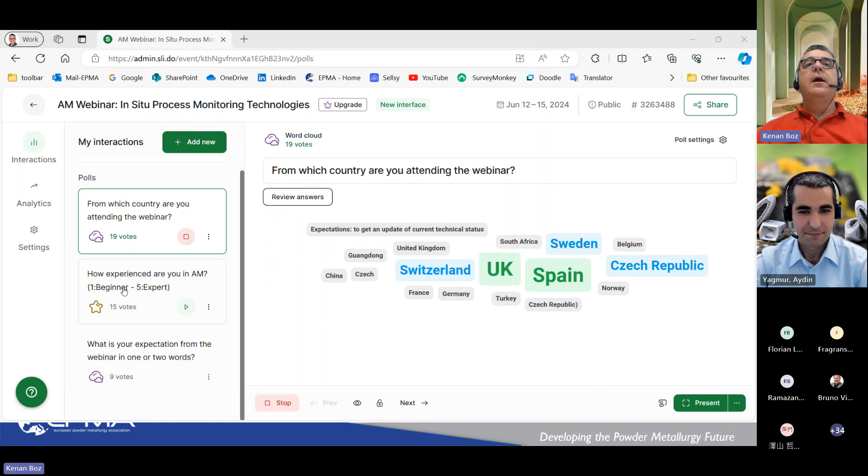I would like to go to the second question. How experienced are you in AM? Well, it looks like our audience is really high level. We have strong experts following us. So thank you for joining and giving time for this webinar.

So the last question is, what is your expectation from the webinar? I think the most important expectation is to learn more about in situ monitoring. So that's why we are here. So we will see that. So that's all for the Slido. Thank you for your answers.

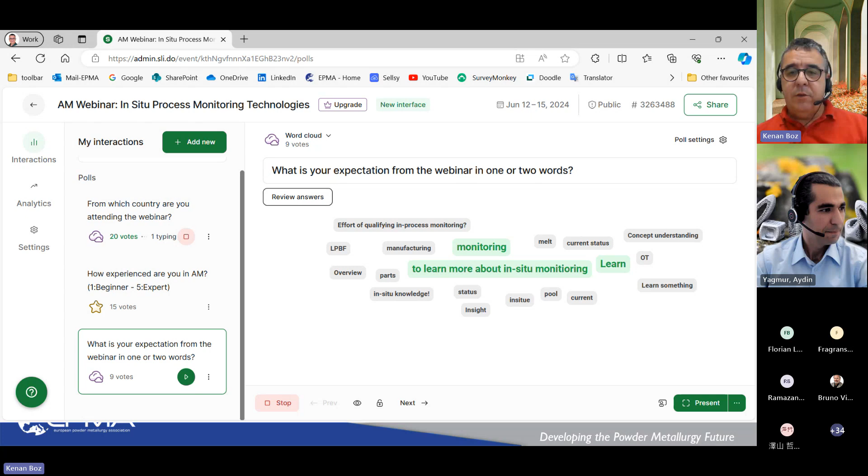Now I would like to introduce you the 2 organizations, that is EPMA and EOS, shortly, and then give the floor to Aydın. Okay. Let's go back. So as I said, this is the agenda. So yes, let me introduce EPMA first.

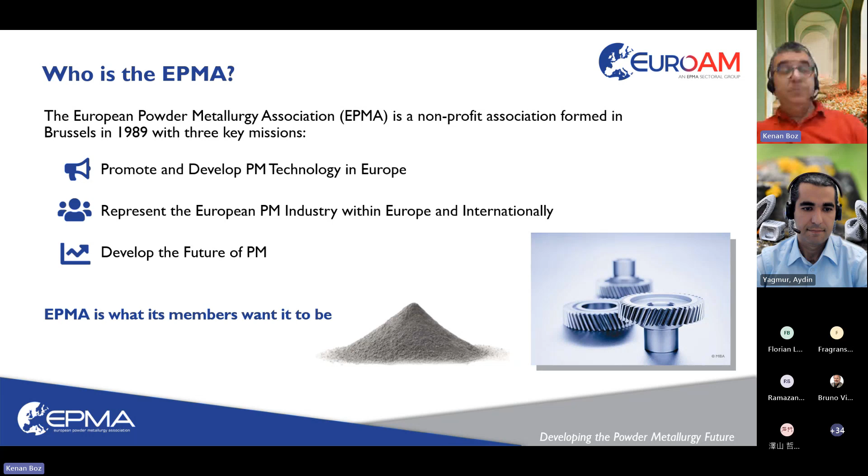The European Powder Metallurgy Association is a non-profit organization built in 1989 with the key missions of promoting and developing the powder metallurgy technology in Europe, representing the industry in Europe and internationally, and developing a future for PM, powder metallurgy. Basically, we say that EPMA is what its members want it to be.

About the EuroAM sectoral group, this was launched in May 2013 and is open to companies, organizations, even individuals across the supply chain who are willing to become members of EPMA. And the EuroAM group has four main objectives. Number one is increase awareness on AM technology, especially metal powder-based products.

Number two, enable the benefits of joint actions like research programs, workshops, projects, benchmarking, statistics, etc., and improve the understanding of benefits of metal-based AM technology by end users, designers, engineers, and students as well. And finally, to assist the development of international standards for the AM sector.

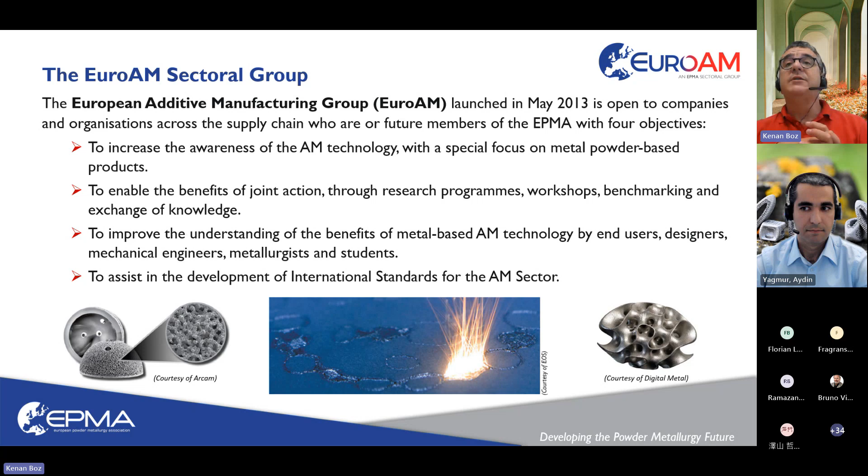About EOS group, I would like to say a couple of words. EOS is headquartered in Krailling, Germany, and EOS is a global leader in industrial 3D printing technology. Just like EPMA, it was also founded in 1989, and the company specializes in providing innovative solutions for AM, including both metal and polymer 3D printing systems. EOS cutting-edge technology is widely used across various industries such as aerospace, automotive, medical, and consumer goods, enabling the production of complex and high-quality components.

With a strong commitment to research and development, EOS continues to drive advancements in 3D printing, offering unparalleled precision and efficiency to its clients worldwide. So that's all about our organizations.

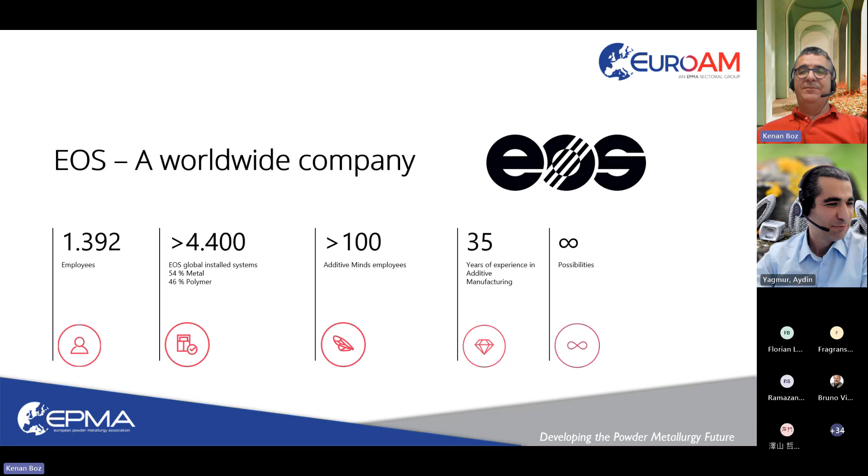Now, maybe it's time to give the word to Aydın. Thank you, Kenan, for the introduction. Yeah, I should maybe stop sharing the screen. Yeah, okay, I stopped. I'm back. So I know it's a lot of words and things. Sorry for that, but this is good for the entire structure of the webinar. And yes, Aydın, you already put on screen the in situ process monitoring technologies topic. So the floor is yours. We will have your presentation, and at the end of the presentation, we will have a Q&A session with our audience. The floor is yours.

Great. Thank you, Kenan, once more. And let's start our webinar. I would like to today give you some insights on the technology, what is today's state-of-the-art technology on in-situ process monitoring, in-situ monitoring systems, applications, of course, the fun part, and the trends and what is coming in the future.

So why should you attend, or why are monitoring technologies of interest today? Because if you look at the recent scientific literature, it is calculated that cost reduction of more than 10% is possible with implementing monitoring technologies. Also, we see a lot of papers and research showing that increasing the performance of materials and products is possible with process optimization, which is more effective by utilizing monitoring technologies.

Of course, for the sake of creating a stable and repeatable process, it is very useful to understand the process and make fine-tuning, finding an optimization of quality, performance, and cost of production. And in serial production, monitoring technologies also enable that the process is documented, recorded, and available for later research or investigations, and it helps companies with quality assurance and process validations, which is an emerging trend. And we have some ongoing projects, which I will describe in some detail in the coming slides as future trends.

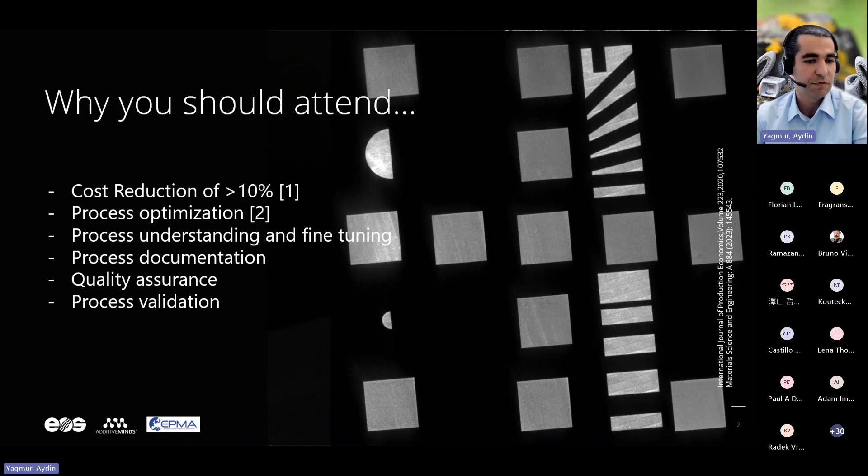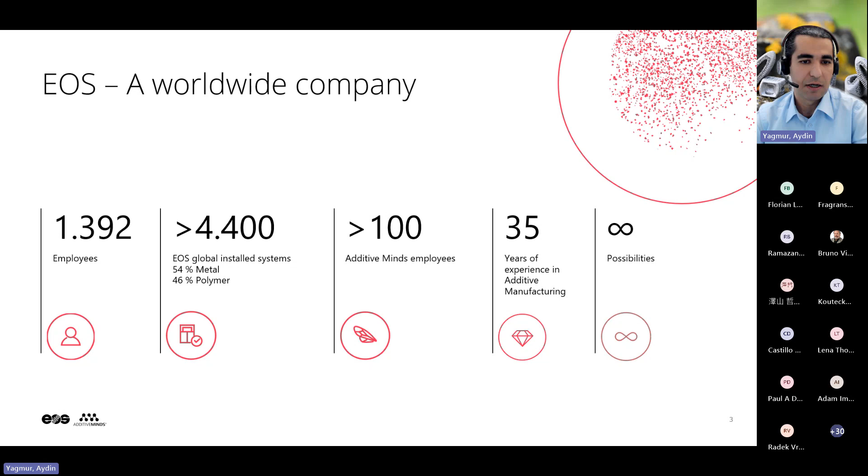As Kenan mentioned, we are a global company focusing only on additive manufacturing, and I am a member of Additive Minds, the application and consulting division of EOS. We are more than 100 individuals with maybe more than hundreds of years of cumulative experience in additive manufacturing, and we help our customers quickly and reliably implement this technology.

As EOS, we are a leader in additive manufacturing solutions, and we see that our solutions are becoming a part of the digital factories of the future. We also see that our technology will be a key pillar of responsible manufacturing, which I will describe in this slide in a little more detail. We see different aspects of our impact on society. The very first one is contribution to sustainability: with our technology, production with less waste, less energy consumption, and less carbon emissions is possible. Also, the cost effectiveness of production and the final product is increasing.

One of my favorite applications is, of course, medical. We see good advancement in the medical industry, especially in patient-specific solutions for improving people's lives. And since the time from design or idea to physical part is being shortened, market entry times are getting shorter and shorter. As a result of all this, we see potential for greater economic growth, enabling different startups to come into the market and advance the technology.

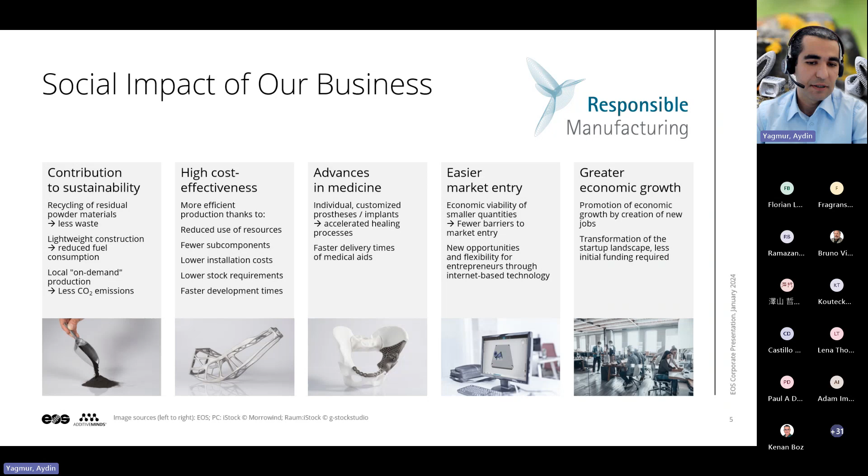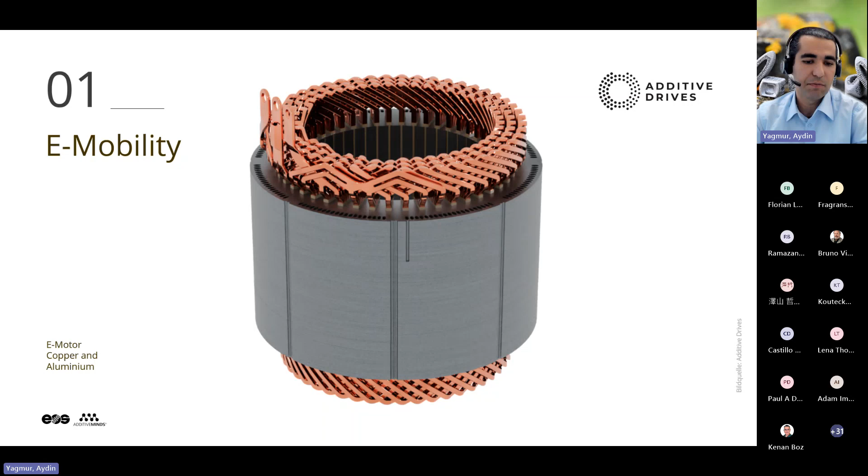Let's look at some examples of how we achieve this. This is a nice example from our partner Additive Drives. It's a copper and aluminum application, hairpin stator prototyping, built with additive manufacturing, which has advantages: no other processes are needed, no forming or welding, and the performance of the product is increased with additive manufacturing.

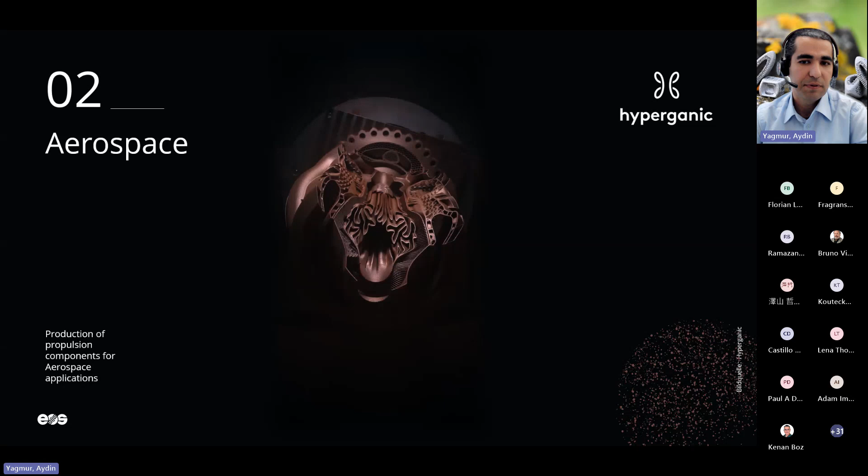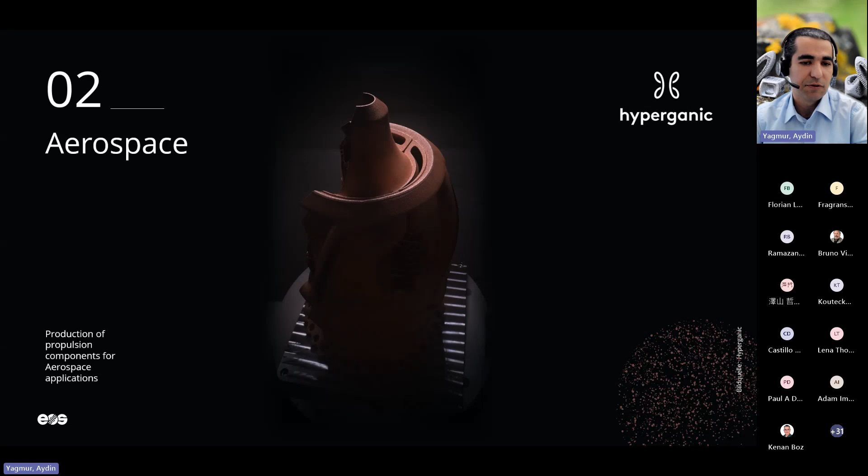Another example is propulsion components. This is an interesting story with the company Hyperganic. This part was designed by an algorithm, not by an engineer, so some kind of design automation is emerging. With our technology, we showed that this can be manufactured. We built this part first on an EOS M 400-4 four-laser machine with Inconel 718, and the part you saw in the video was also built on an AMCM machine with copper.

The last example in this section is a heat exchanger used for racing cars. With our partner Conflux, this application was successfully implemented. What are the advantages? I think it's self-explanatory that a highly complex structure was achieved. The efficiency of the heat exchanger increased, and the dimensions and weight were reduced, so in total there is a very good improvement of the heat exchanger, having an effect on the automotive side.

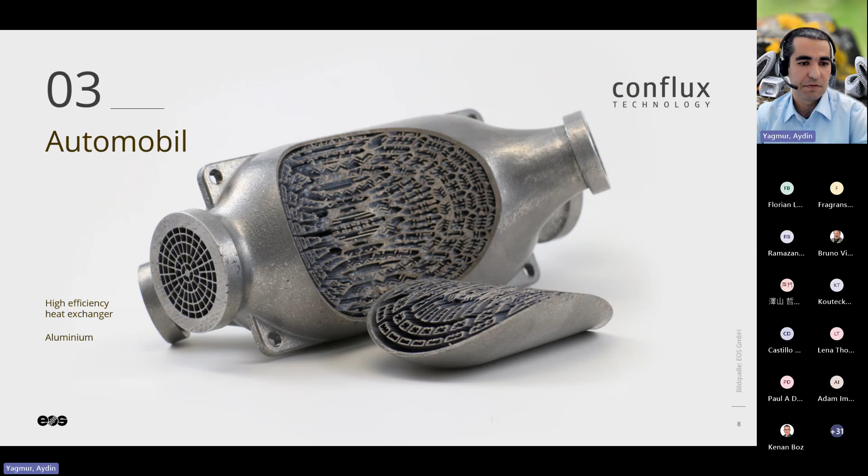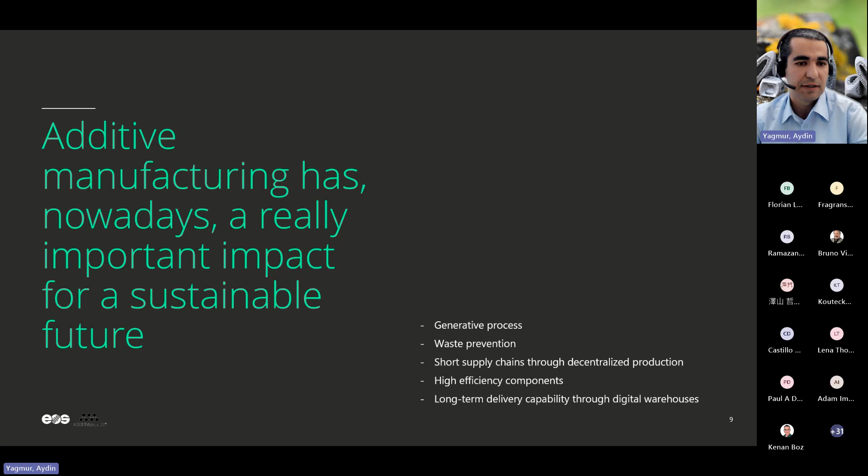So we see a good commitment and a good way forward for additive manufacturing for a sustainable future: we decrease waste, we increase speed to market, and supply chains are getting optimized because decentralized production is possible with additive manufacturing. Production on time is also possible, so stock costs and resource consumption are also decreasing.

After this introduction, I would like to start with the foundations of our technology, direct metal laser solidification, as we name the technology. General literature also calls it laser powder bed fusion. I would like to start with the foundations of the technology; this will be an answer to why we need monitoring systems.

Since the audience is very experienced, I will go very briefly over how the technology works. We mainly have a CAD design, and we create slices of the part, so layers. Each layer is exposed with a laser and solidified layer by layer. For each layer, of course, powder is recoated for the next layer. At the end, we have the three-dimensional final part.

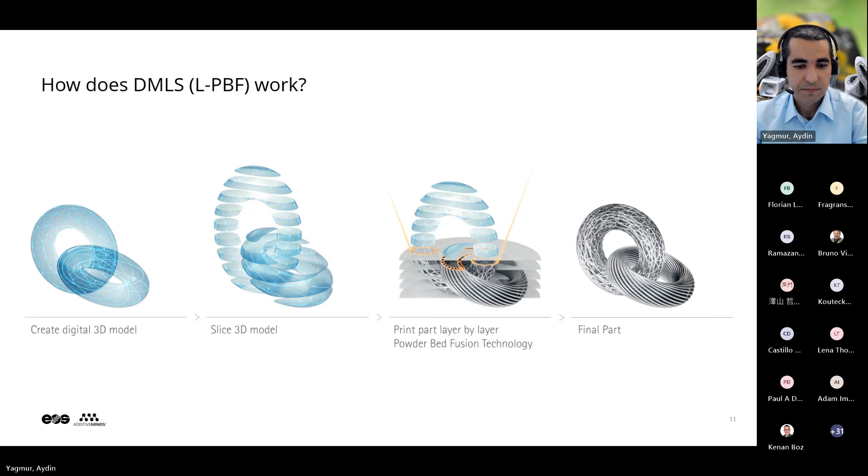Let's go a little into details: how lasers and metals interact. A good starting approximation uses power density and the corresponding behavior of the metal. If the power density is less than 0.1 megawatt per square centimeter, this is simply heating of the material. If we increase the power density to 0.5 megawatt per square centimeter, we observe conduction melting.

If we increase the power density even further, we have so-called keyhole melting, which is the heart of our technology. If we keep increasing the power density, we observe plasma melting, which is not desired for our technology because the created plasma interferes with the laser and prevents laser-material interaction, decreases the efficiency of laser absorption, and causes quality problems. So our technology relies on keyhole melting.

There can be some questions. In the image you see there are some byproducts coming from the melt pool. Why do we not use conduction melting, which is a more calm process? There are different reasons. The very first reason is the productivity.

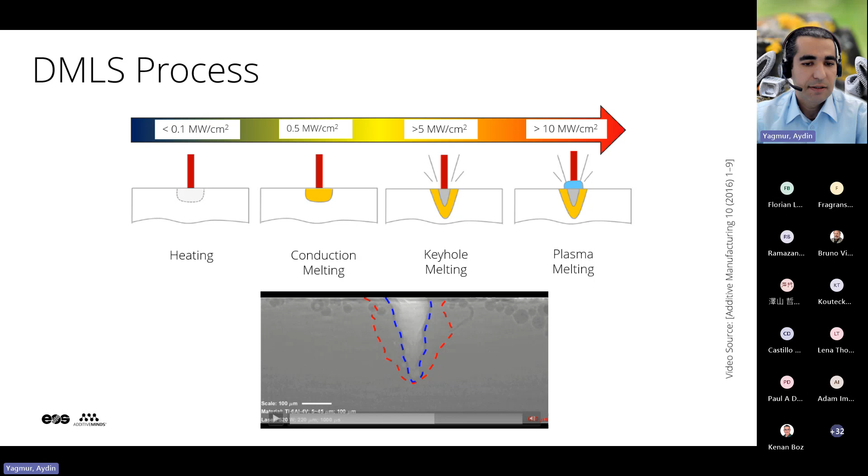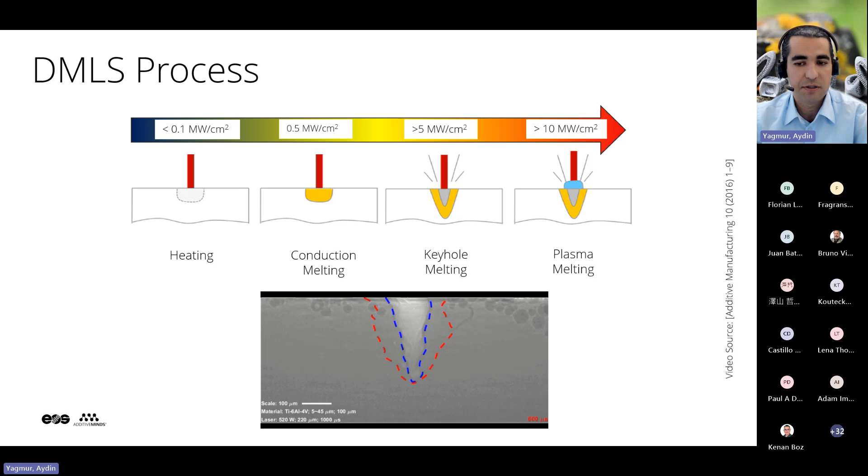Let's have a quick look at a video from this source where we can observe the formation of the keyhole during this dynamic process. Between the red dashed line and blue dashed line, what we see is the molten metal. And within the blue line, we see so-called keyhole melting. In this area, we have a laser beam and metal vapor. And this area can also create so-called spatters, which I will give some more details on in the coming slides.

And if the process is not optimized or some interference or problems occur, what will happen? If the laser energy is not absorbed by the material in the optimized way, we observe a formation of volume defects, so-called lack of fusion defects, which are very damaging to the material properties because of the shape with notches inside. Lack of fusion defects are not desired, are not accepted in additive manufacturing.

You see different visuals here, an SEM picture on the top right side, and also metallographic pictures, and we can also estimate the shape of the metal powder, the raw material, which was not fully fused or melted. This is why we call it lack of fusion. So this is what happens if the energy input is less than the optimum values.

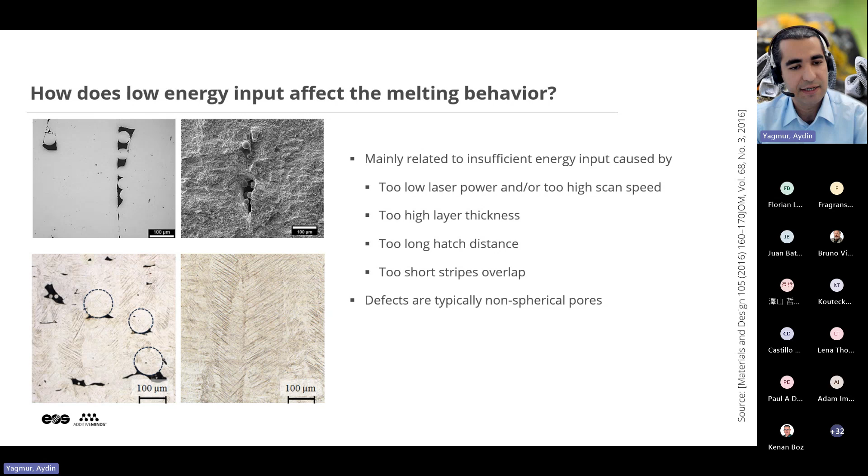And if there is too much energy on the other side, then we see instability of the keyhole, causing more sphere-like defects. Sometimes I see that these are called keyholes, and that keyhole is not desired. This is not exactly true. Keyhole defects, which come from the destabilization of the keyhole, are not desired. The keyhole itself, a stable keyhole, is the heart of our process.

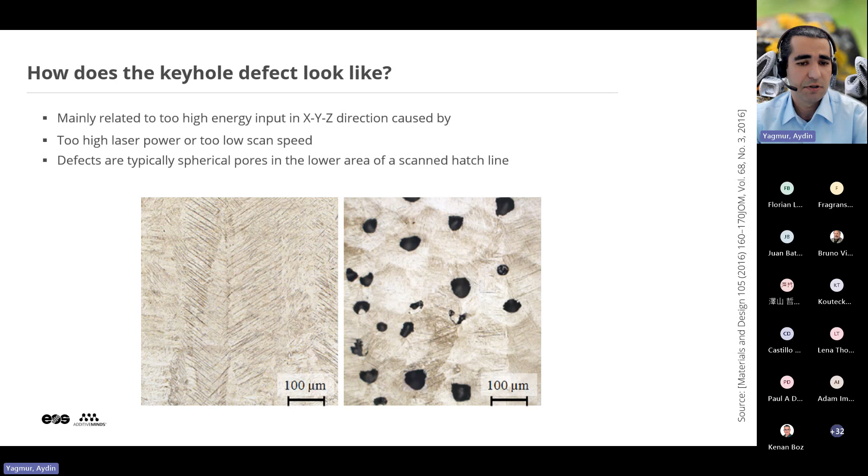As I said shortly, the process can create different byproducts, including so-called spatters, solidified metallic particles that are spread along the powder bed, and they may have different sources. For example, the very first type is created from the keyhole directly due to the pressure difference, and they can create sphere-like spatters.

The second type is coming from the melt pool, where the laser has just passed, having a more irregular shape, or molten material just falling down on the existing, not yet melted powder, which also has irregular shapes. So these are mostly non-desired, or at least these kinds of byproducts should be under control.

That means the laser powder bed fusion process is highly dynamic, and when it is not optimized or when some problems occur during the process, the byproducts created can cause problems. And that is why we need monitoring systems to record and understand how the process is being optimized, and also to qualify that the process is working as it is supposed to.

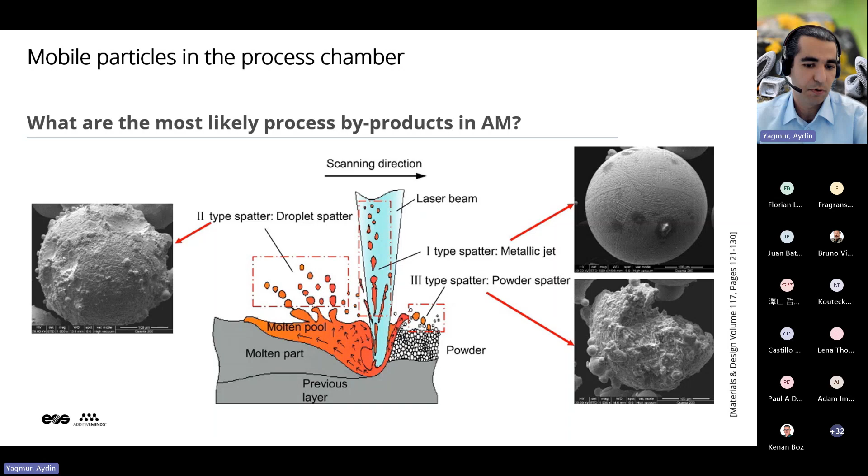We understood the need for monitoring systems, so let's see how monitoring systems work, what kind of information they deliver to us, and how we can understand, for example, different process behavior like we see here in a design of experiment build where we apply different parameters.

What is in-situ monitoring in additive manufacturing? First of all, I can recommend for further reading a good ASTM standard, which you will find in the handouts that we will deliver after the webinar. So it's very good for further reading.

In my own words, in-situ monitoring is recording the data during fabrication with different sensors. I will give some details about types of sensors. And also analyzing data during and after fabrication, which is an emerging topic that I will also give some details on. We can analyze data, and nowadays we can also control and regulate our process during the process using the data from the monitoring systems.

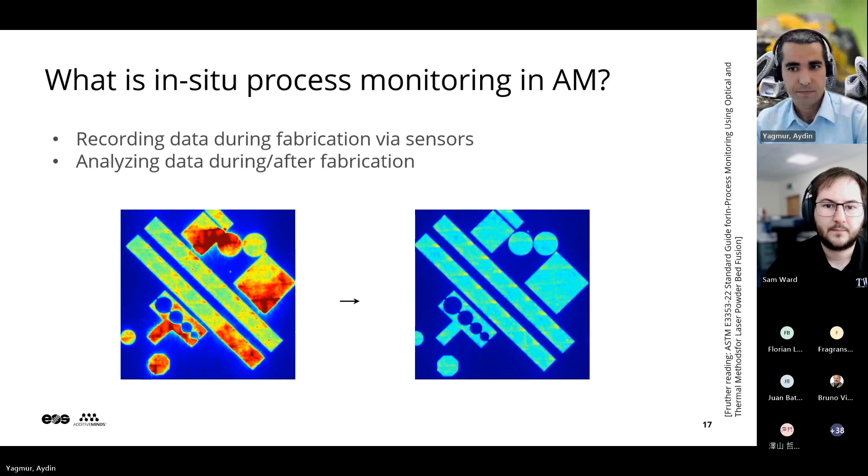At EOS product portfolio, we have different grouping of sensors. The very first one is powder bed. So it is like a webcam taking pictures of the powder bed after recoating and after exposure, and gives engineers a chance to analyze most of the building problems or recoating problems.

Then we have a melt pool system. It is a photodiode that collects the backscattered laser beam in visible spectrum and near infrared wavelength spectrum that give insights from the melt pool, as the name indicates.

The next system is EOSTATE Exposure OT, which is a unique solution in the market, that it is a camera taking pictures of the whole build plate during the layer time and gives us a long exposure or long time information of the powder bed, not only during melting, but also after melting. So we can see the whole build plate with EOSTATE Exposure OT.

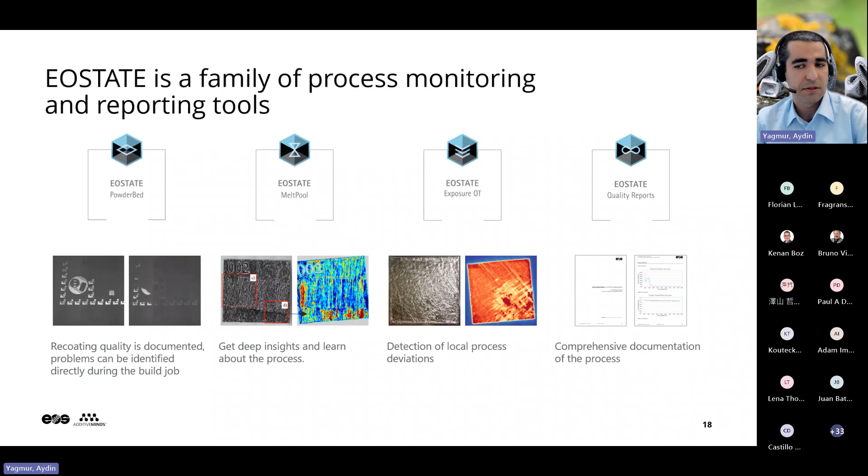Quality reports are all the rest sensors, for example, oxygen concentration, temperature or humidity, which is also very useful to document and to analyze the production. Let's have a deeper look. What kind of sensors get what kind of data?

This is the very first one, melt pool monitoring. This is an addition to the optical path, and it detects the intensity of the light. It is a photodiode. What does it mean? Photodiodes can record the intensity of a given wavelength, but they do not have location information. This information is taken from the scanner, and the images, which I will show in a few seconds, are created from the melt pool. So melt pool is getting information from the melt pool only. So you can analyze the stability of the laser exposure with melt pool.

The second system is a camera, so it knows where the signal is coming from. No additional information is needed for the data, and it takes pictures during the layer time. So it takes pictures before, during, and after melting, and we can have an integrated image of the full build plate. A big difference between OT and melt pool is with melt pool, we can gather data only from where the laser is melting. So we cannot get data outside of the parts that are being fabricated. But with OT, we can also get data from the surroundings, so the whole build plate.

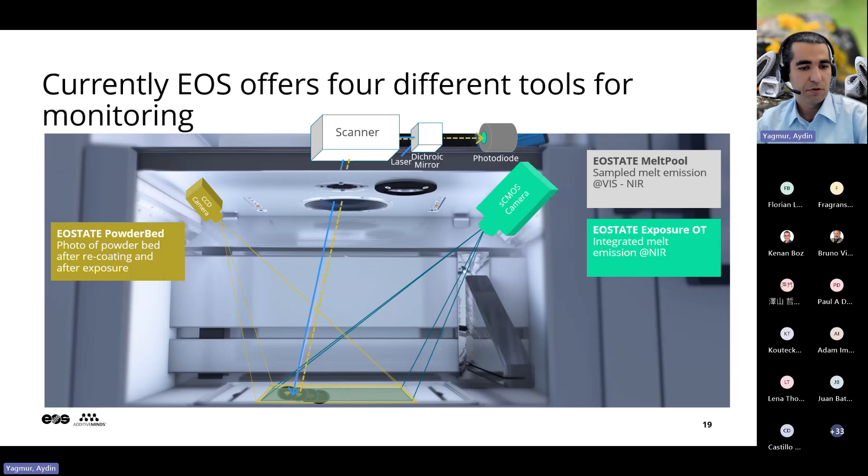And last but not least, we have our powder bed camera, which is also very useful for buildability problems, recoating problems, to understand how the process behaved. I would like to shortly show a good feature of our powder bed camera, that we can watch or observe the process live with powder bed, which is not being recorded, but we record pictures after recoating and exposure.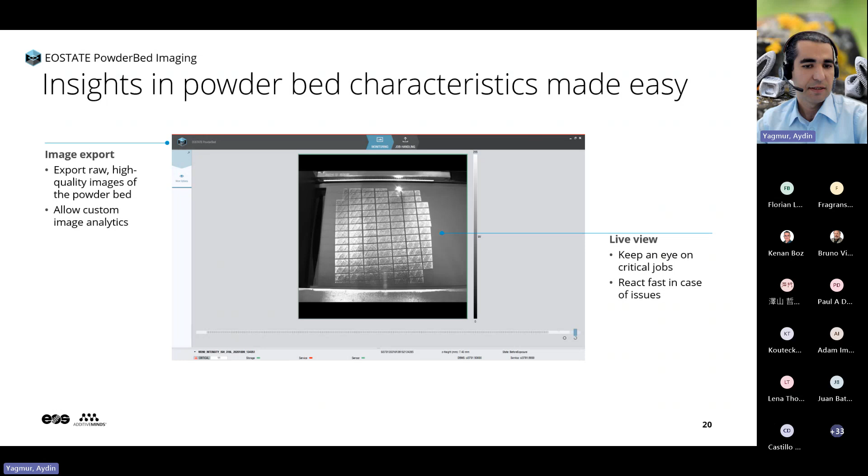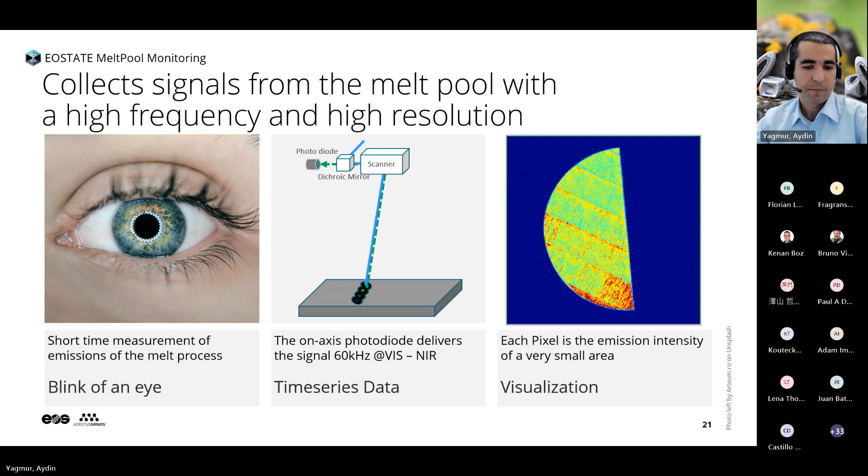For melt pool, as I said, it is focusing on the laser exposure area and getting the location information from the scanner and created this compound picture. So all this information that we see on the right side was recorded by the photodiode, and with the location information from the scanner, we created this compound picture. And what we see here is, for example, in this area, an overheating caused by short vectors, and we see the behavior during melting.

Let's look at the same part, but this time OT picture. OT records the data not only during melting, but also cooling down, also solidification until the layer is completed. So we have a different picture here. So we see that a bigger area was influenced in terms of overheating, and this was detected by OT. And as I said, we can also see the spatter behavior.

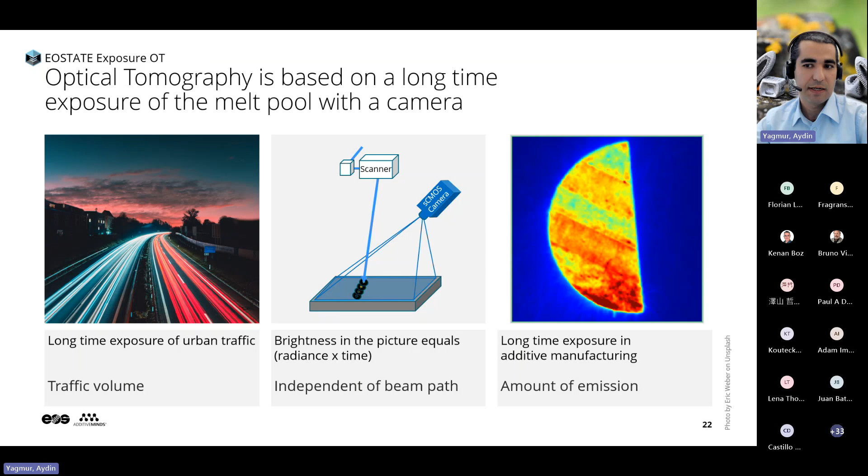What lies behind this? Let's have a repetition. This is the camera taking data, pictures, 10 pictures per second during the layer time, and getting information, not only backscattered, but also any kind of emission created on the powder bed.

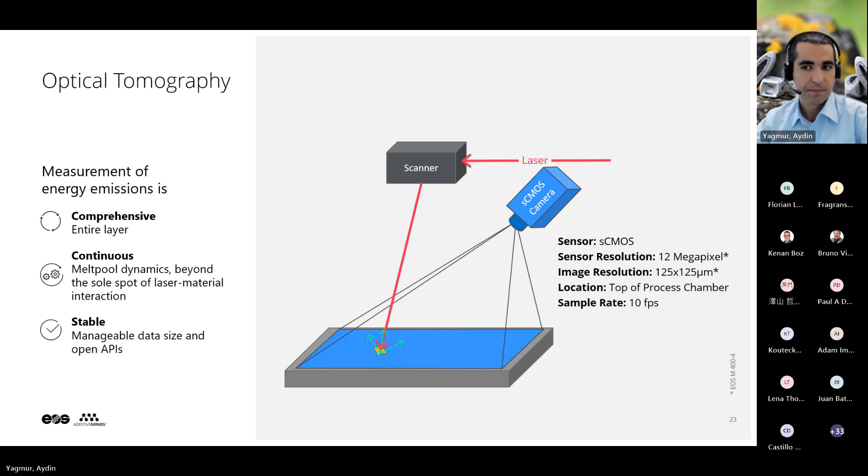This is the interface, and if you are familiar with EOS software, they have similar backbone. So it is, I would say, very user-friendly interface that we can see the created images. It is the same software, the same interface for both OT, melt pool, and powder bed. So we can see the images. We can see the statistical summary of the part during the Z height, and we can see the indications. So anomalies detected during the build by OT software.

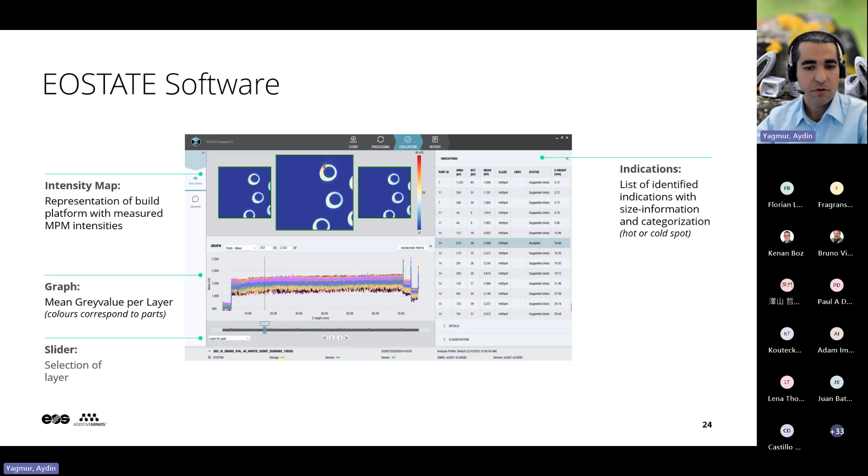Let's have a look at what kind of anomalies can be detected. For example, here you see with the red line the anomaly on the part which is coming from the laser flow interaction was detected by our OT. We have different detectors that can be optimized, and we can detect this area. This is documented. The intensity of this area is documented, and we can compare and evaluate the formation and the severity of the indication. Here is again an example of short vector induced overheating. These areas also can be detected.

And for further analysis, for example, stability of a process, maybe dynamic properties, dynamic material properties of a process can be detected by using OT images. So we can see here 4 different parameters applied, and with some third-party software, we can even make numerical analysis of the spatters. We can count them. We can also analyze the mean value and even size of the spatters.

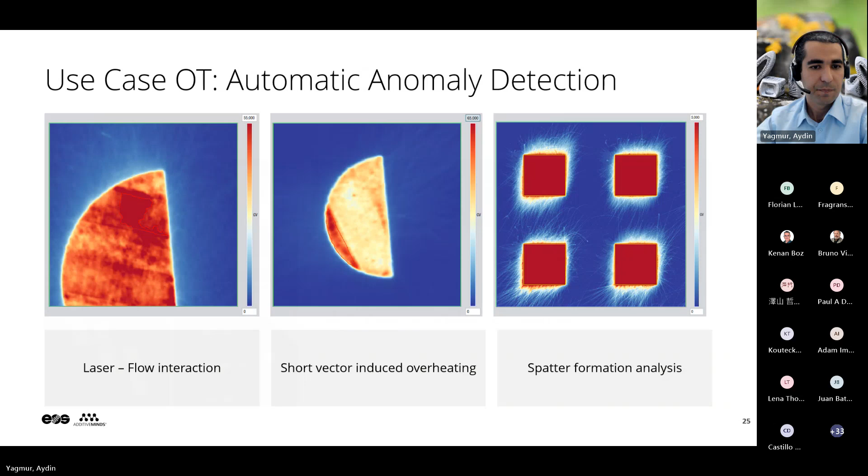Some examples, use cases. If there are dirts or problems on the optical path that affect the laser beam, we can detect them easily with OT because we see anomalies which can also be automatically detected, always on the same position. This is a good indication that something is wrong in the optical path, causing improper or non-optimized laser material interaction, which should be solved.

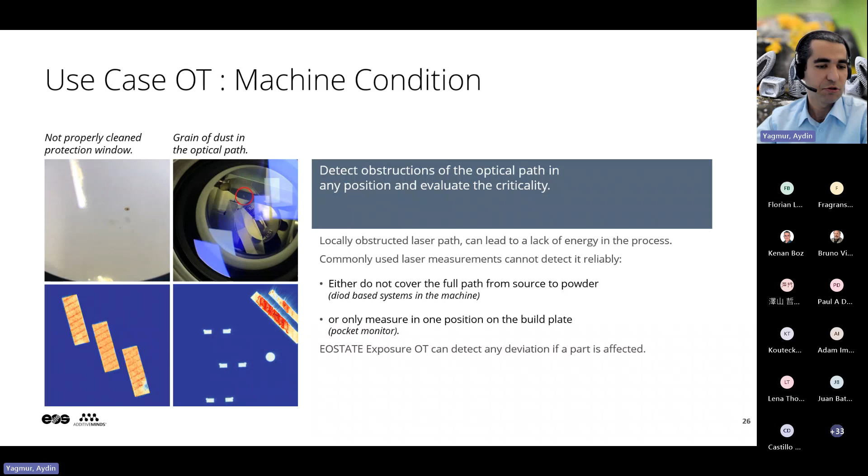Another use case is from our colleagues in the APAC region, who worked with a university, and we also have a white paper on this. What is the correlation of OT with CT? Because CT is widely used in industry, can we replace CT scan, or reduce CT scan costs by applying OT? The answer is yes.

We created a setup that causes unpredictable random problems in the process, and we compared the signal behavior of OT with the CT scan. We came up with a result showing a very high correlation of OT signal to CT signals, which is good proof that OT can be used to decrease qualification or quality control costs.

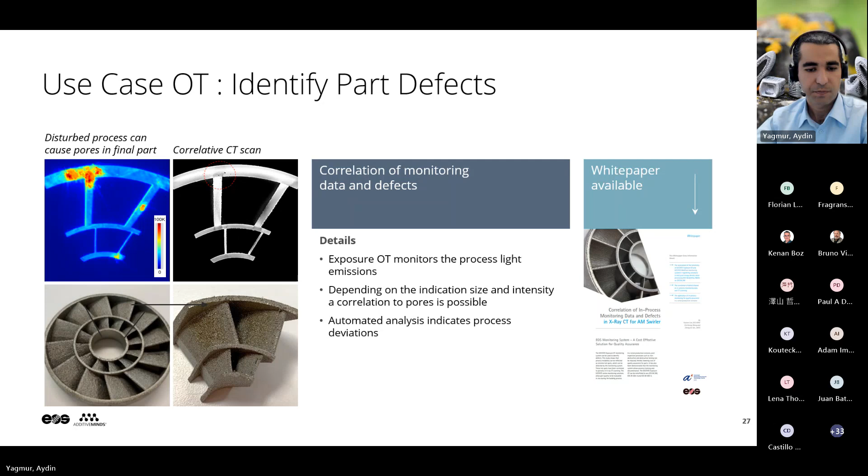Another use case of OT is Smart Fusion, a relatively new technology that we released last year. This mainly regulates the process on the fly using data coming from the OT system. It avoids any kind of inhomogeneity in the part that can cause overheating and other problems like excess residual stress, deformation, recoater crash problems, or different material properties.

For example, we applied 3 different parameters here, and I assume that after this introduction, it won't be very difficult for you to estimate which dog bone tensile specimen was built with Smart Fusion. You can see that Smart Fusion avoided overheating and assured homogeneity throughout the Z height.

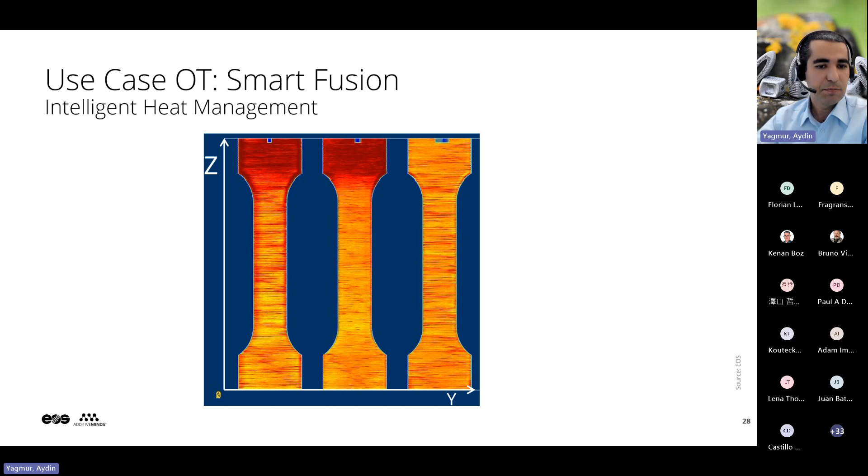Let's have a deeper look at how it works. In this example, we built an impeller. You see layer n-1, and in layer n, a lot of new exposure areas are melted just above the powder bed. What does this mean?

The thermal conductivity of the powder bed is poor, causing a lot of excess overheating. If you've ever built parts on an AM machine, you may estimate that in 5 to 10 layers, this overheating will agglomerate into a lot of thermal stresses, and you'll see recoater contact and recoater crash. With Smart Fusion, in the next layer, we regulate the energy input of the process so that overheating in these areas is reduced.

In the coming layers, it will stabilize even more. If you don't use Smart Fusion, the overheating will agglomerate, and even already solidified areas of the part will start to overheat, causing deformations and recoater crash. So it's not possible with nominal processes to build such an impeller.

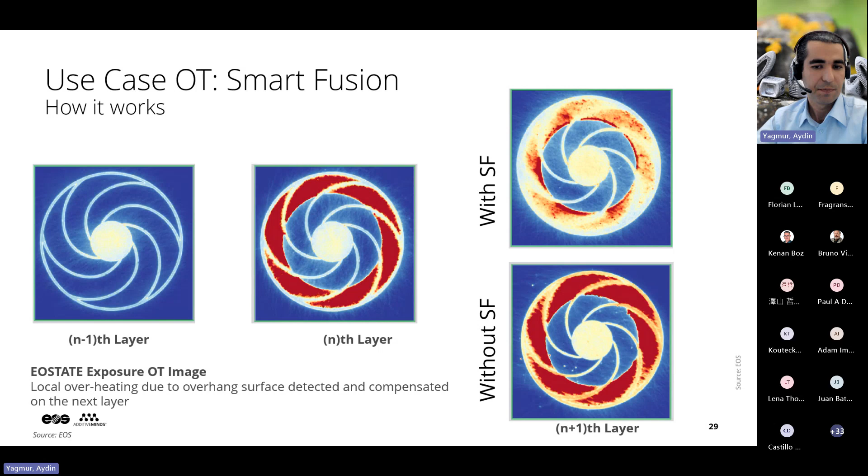Let's look at some applications built with Smart Fusion. This is an automotive bracket from titanium 6-4 alloy, built with our M290 machine. Smart Fusion is available for all EOS metal machines; this time we used the M290.

By reducing this support amount, we decreased the cost per part by 34% because less supports are used, less material used, and build time decreased, so machine efficiency increased. Also, post-processing effort was decreased by reducing the support amount by 80%.

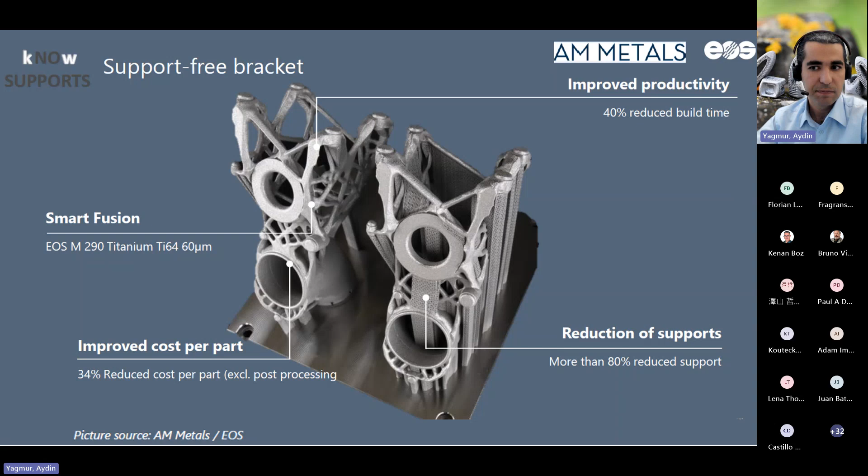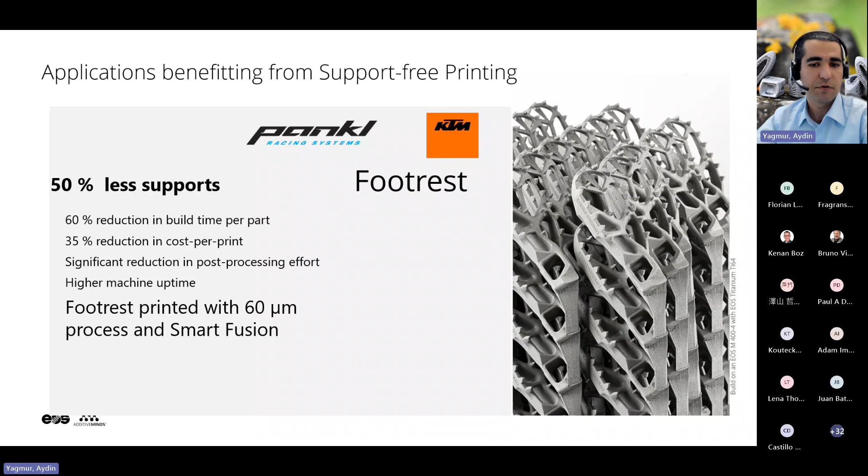Another application is a bicycle footrest that we built as a project with Pankl, with the final customer being KTM. We built this part again from titanium 6-4 with much less supports, which reduced the part costs by 35%. The supports were so weak that they could even be removed by hand, so not only was the amount of supports to be removed reduced, but also the effort for the remaining supports was reduced with Smart Fusion.

Another example is a fuel tank, again from titanium 6-4, on an M300-4 4-laser machine, which we could build without any internal support—completely closed. You see the top section of the part, built again with Smart Fusion without any internal supports, which otherwise would not be possible to build, or even if built, the supports could not be removed afterward.

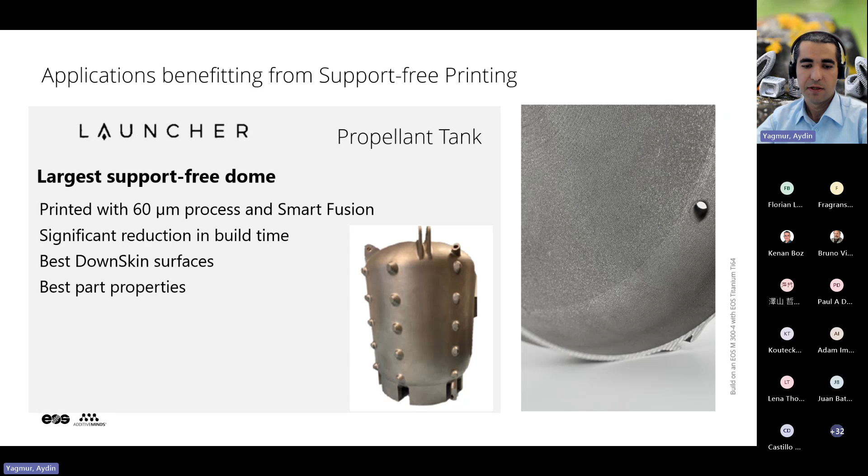Last but not least, we have this huge impeller, about 28 kilograms, made from Inconel material and built on the M400. We built the part with 96% less supports using Smart Fusion methodology, so the part could be built with much less support without any problems.

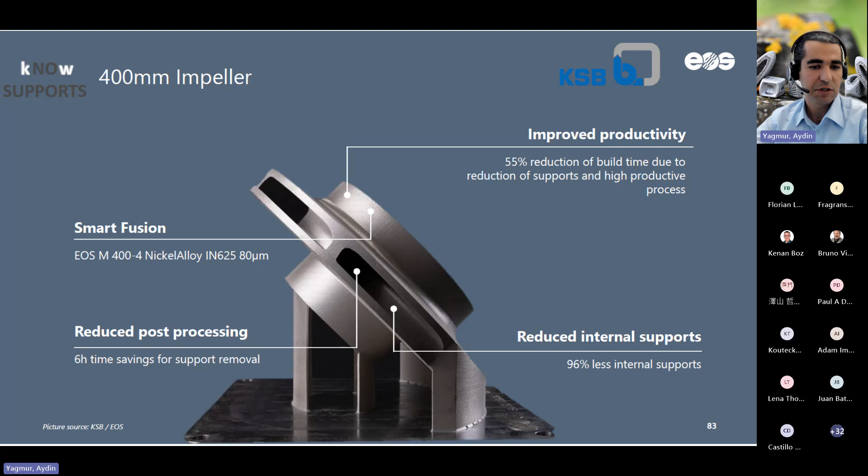With Smart Fusion technology, we see good potential to increase productivity, decrease cost per part, energy consumption, and scrap rate.

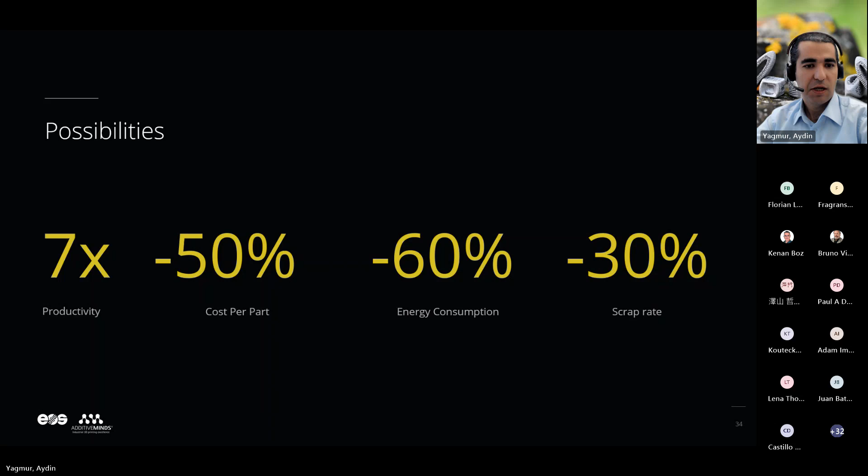After seeing state-of-the-art monitoring systems and applications, I would like to show some insights of what is coming next.

One project we are now working on is applying statistical process control for OT data and analyzing it for quality control purposes. We build different parts and analyze the nominal or natural deviation of the process intensity, and we create statistical limits.

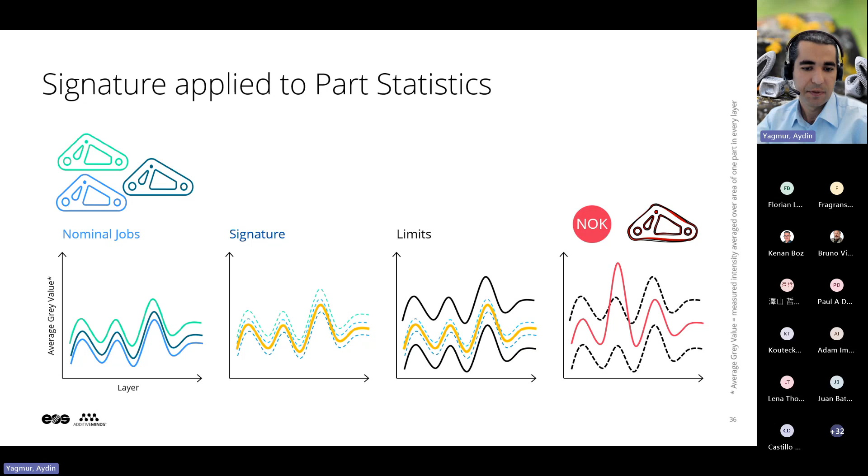Whenever a limit is exceeded, this means a problem or anomaly in the process which should be analyzed. What we foresee with this improvement is bringing quality assurance to the process during the build, which will decrease cost and enable penetration of additive manufacturing to more applications.

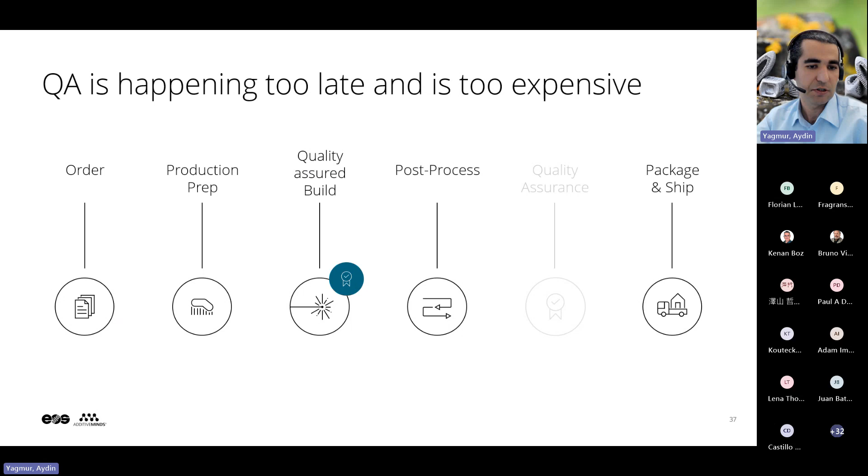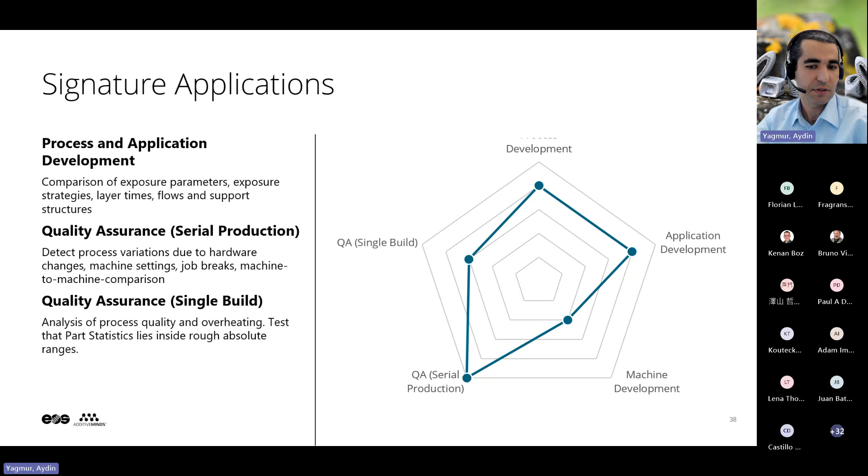This analysis we are working on to automate. Different jobs should be built for the database, and afterwards this statistical process control gives insights about the quality assurance of serial production - are there deviations from job to job, and what could be the reason? For example, is it overheating, or a problem with the recoater alignment? It gives deeper insights which are not easy to recover or understand by just looking at some graphics. So it is a good advanced statistical process application that we are now working on.

Our colleagues in North America have two very interesting projects going on. The first one is to reduce qualification costs and time by implementing different sensors, including OT and melt pool monitoring. We will build the layout and correlate the results with the sensor data.

Then we will start to decrease testing. The aim is to decrease testing by around 50% for qualification purposes, replacing the testing step by step with sensor data.

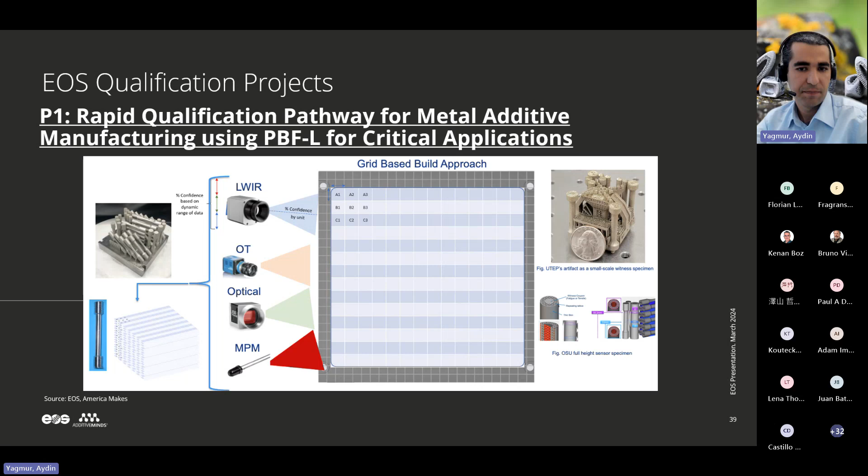It will be possible to use AI and monitoring data to test one sample instead of three different samples. So in this project, the number of samples to be built for qualification will be reduced by implementing monitoring data and correlation to the parts and also the geometry of the part.

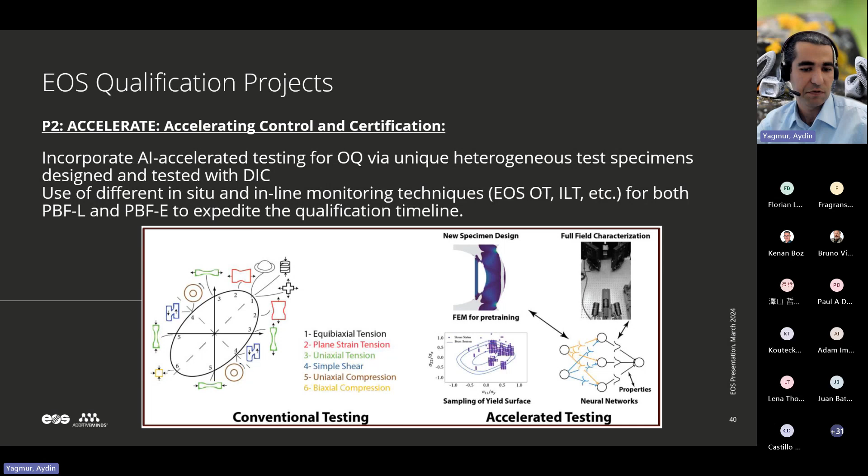Last but not least, we have a developer network that third-party companies can reach through our APIs to create their own software products. To mention, we are now working with Interspectral, or 1000 Kelvin, who use the EOS developer network to develop their own products.

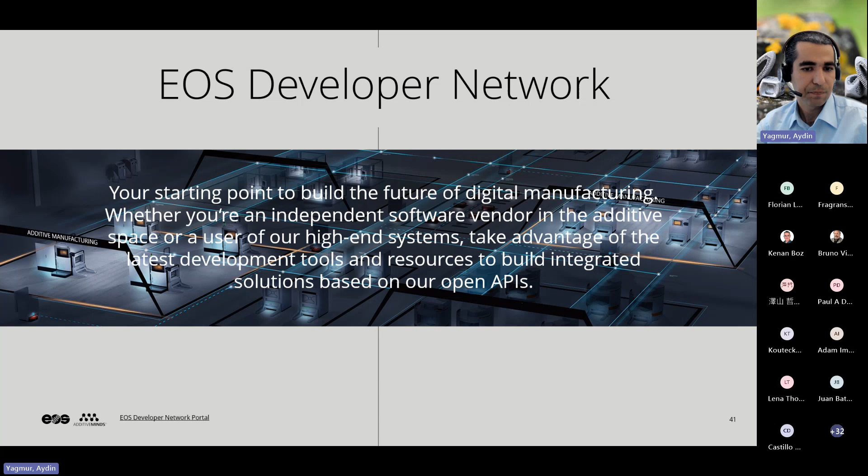That's all from my side, and I would like to get your questions.

I always wonder about the challenge in evacuating the powder in the very first structure you showed, the heat exchanger. It's in the powder bed and the interior is very complicated. How do you succeed in cleaning such parts, the interior, so that there is no clogging with leftover powder? Is there a certain solution you use for that?

We have partners we are working with, and the very first step to solve this issue is optimizing the process so that the powder, if not melted, will not be caked like a cake, so that it is still flowable. It should remain flowable, and we use depowdering equipment which can be optimized based on the shape and complexity of the part. We are also following the literature - there are new test methods being developed, and we follow these to test and prove that the powders are free.

Because as far as I see, this is one of the most important challenges for internally complicated parts - to achieve good cleaning in terms of functionality.

Yeah, that's true. So there are two pillars: first, using equipment to depowder the part, and also testing and proving that there is no powder left - or 'no powder left' is maybe a little too optimistic, but acceptable levels.